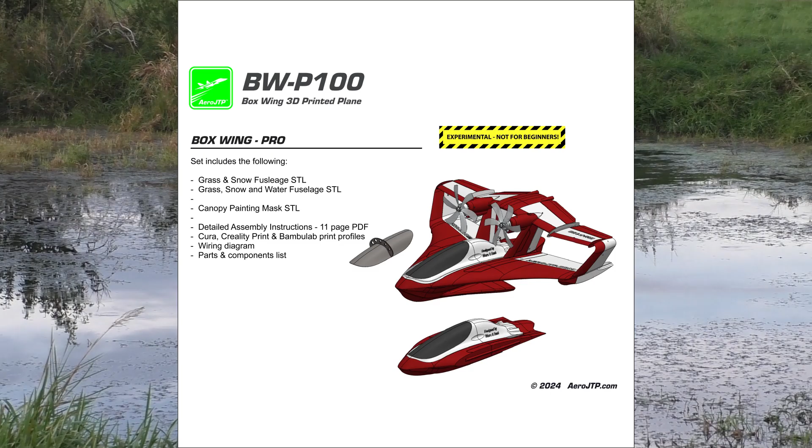Yes, that's me bringing the Boxwing out for his first water start. This is the biggest lake we had near the airport, so this was the only chance to test if it will be possible to start and land from water. And you can see here there aren't much difficulties. It works, and the Boxwing is finally available on our website aerojtp.com. Now let's take a look how the final prototype was made.

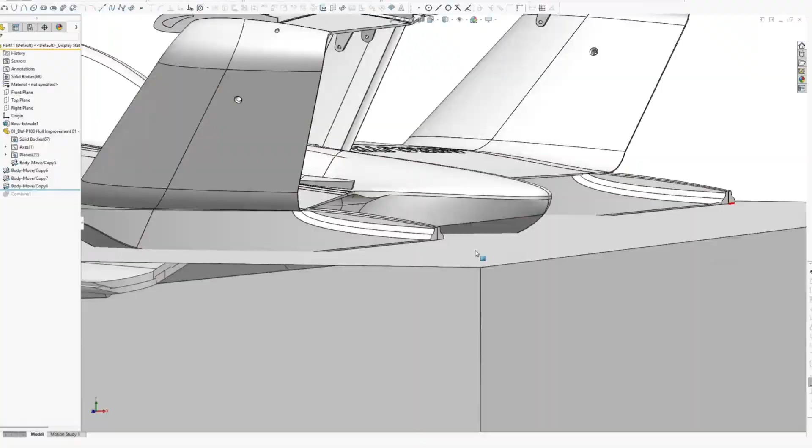Problem with the last prototype was that it just sank too deep into the water. It also doesn't glide as good as it should to perform a very short distance water start. So we had to design the whole underbody fuselage. Here you can see what we did: we just spread the wings and built it out like a kind of surfboard with much more area for better buoyancy and also better glide capacity, so it will lift off the whole body immediately when the Boxwing starts accelerating on the water surface.

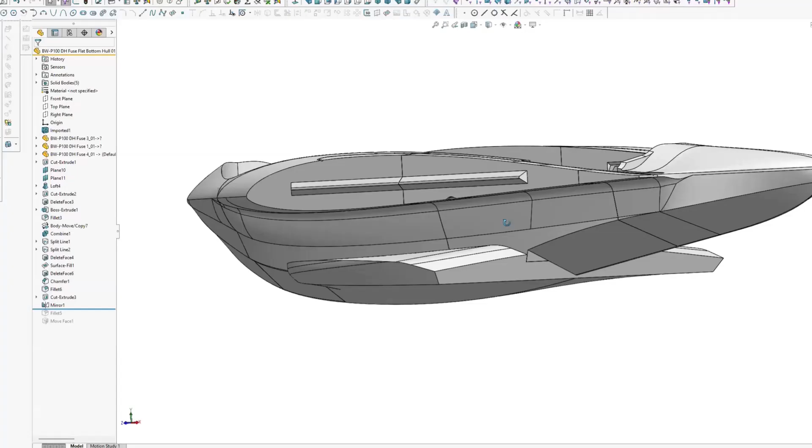Also on the tail was a lot of volume added to prevent deep sinking into the water, especially when immediately stopping from high speeds. And to give the Boxwing some grip while traveling on water, we added these steps at the tail from the underwing that should prevent too much sliding to each side.

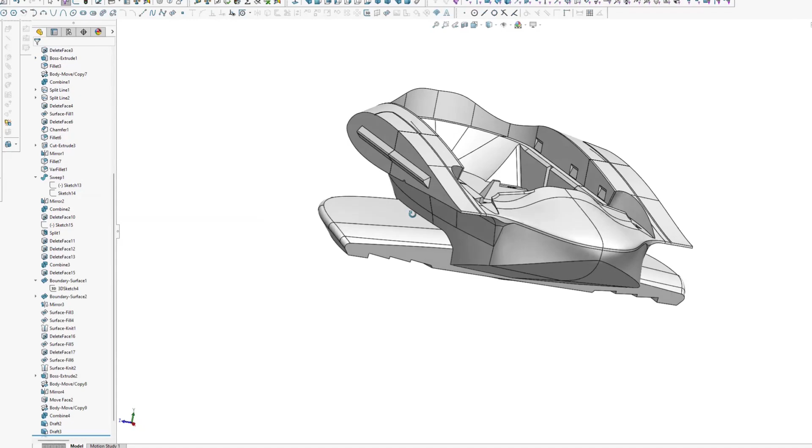Finally a cooling for the motor mount was installed, so it is also possible to print this from normal PLA. It should be printed from much more temperature resistant materials like PETG or ABS, but with this internal cooling tunnel it is possible and keeps the whole motor much more cool.

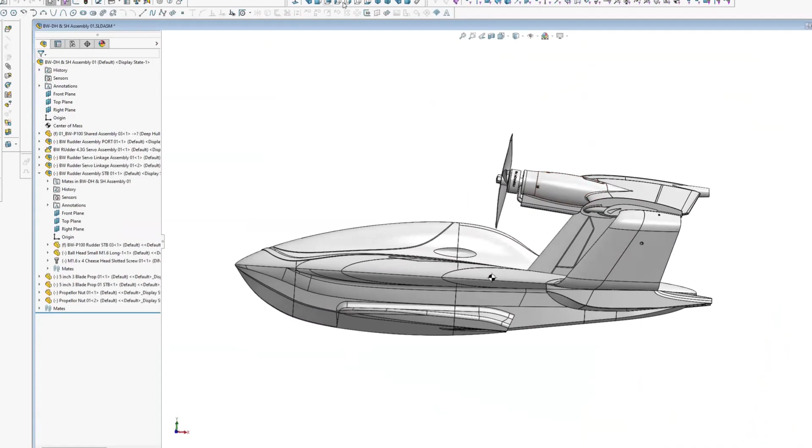And that's how it looked like, our final design from the boat version, the water version of the Boxwing. As the last step we added some nice FPV features where you can use two cameras, one fixed with a front view, and the second one which is on a gimbal for tilt and pan.

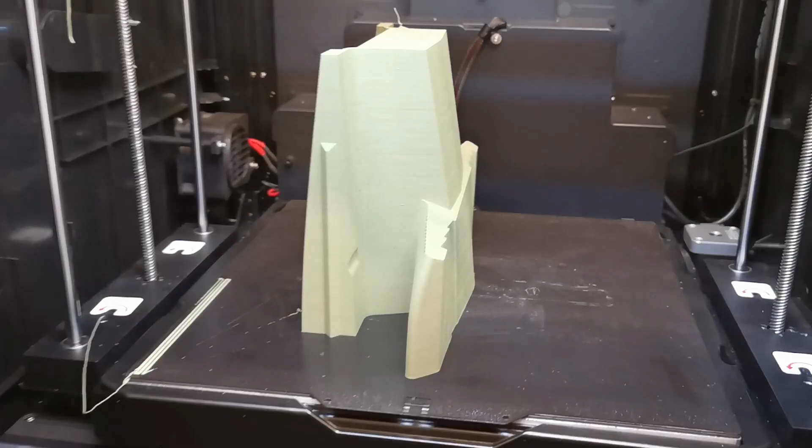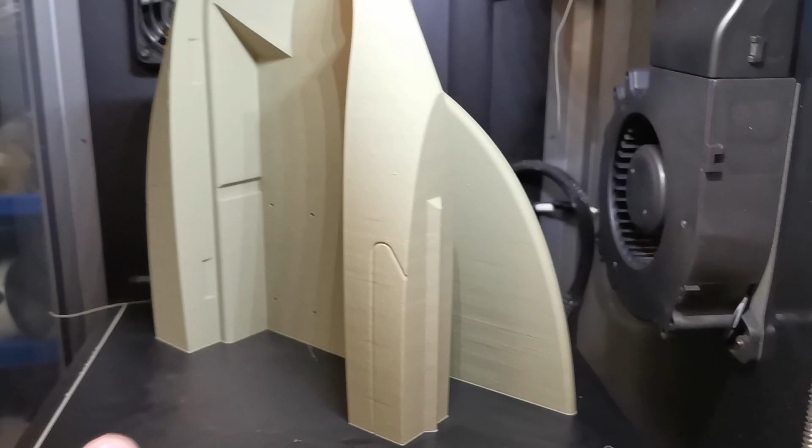And the new big parts with the new underwing are printed. Bambu Lab did a nice outer wing. Comes to the others, and here's the front part. Really love this outline.

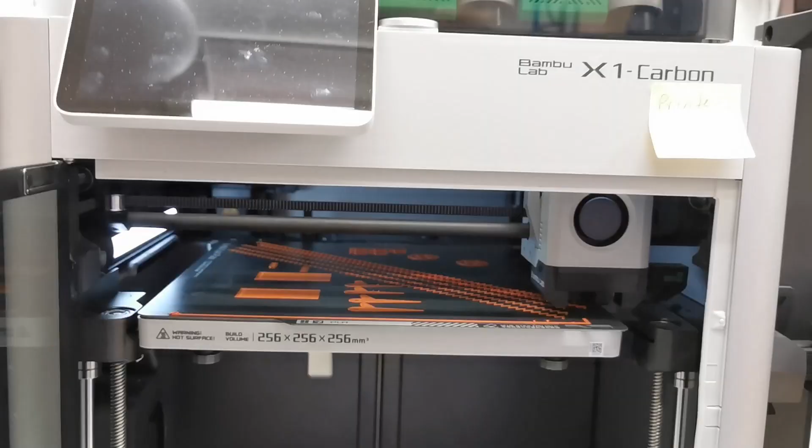And the last parts are getting ready. New wings with the fences. And the Bambu Lab made some wonderful PLA parts. First time these zigzag stripes printed, super sharp. Almost all parts are done.

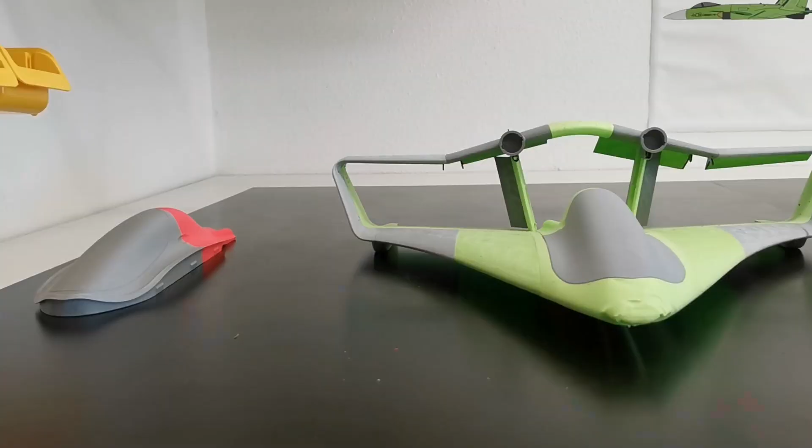It's time for prototype number 4. I think on no other model I built so many different prototypes, because this Boxwing is so special. Let's see how this is coming out.

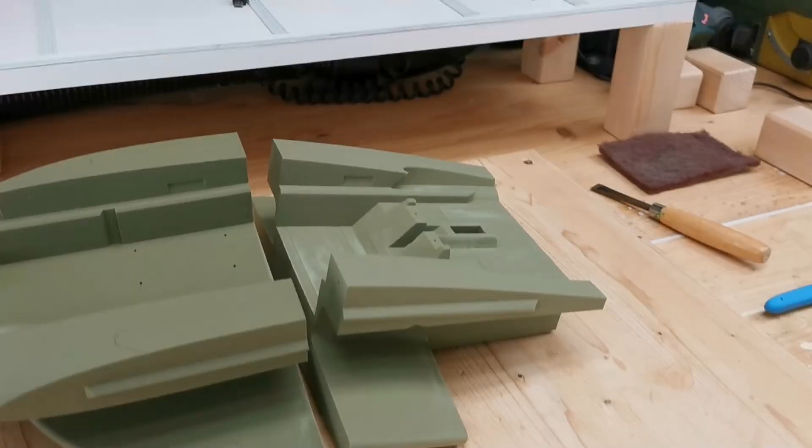Oh, here are the new special parts with complete integrated lower buoyancy wing. See what this weight says, 61 grams. That's really a big part, super lightweight and nicely detailed. And the second one, 44, perfect.

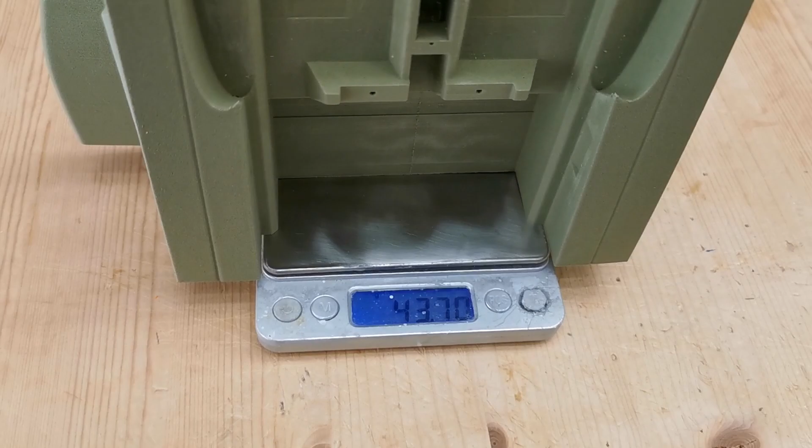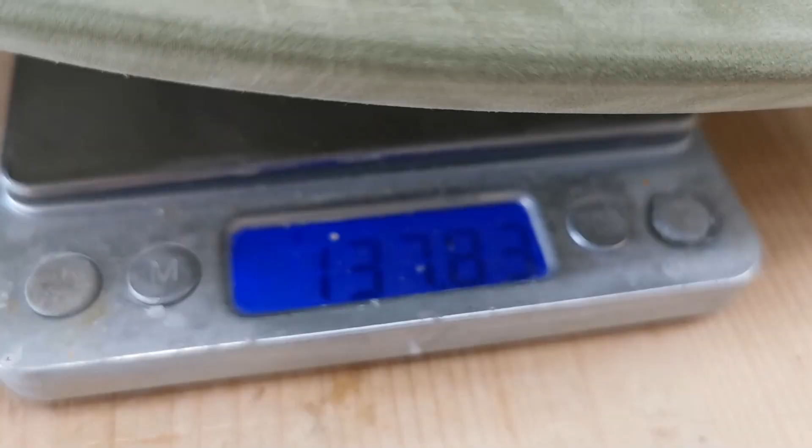The all-new Boxwing fuselage. And here it is, the all-new fuselage, with the special surfboard underdesign to glide on the water. Weight just 138 grams for this whole thing.

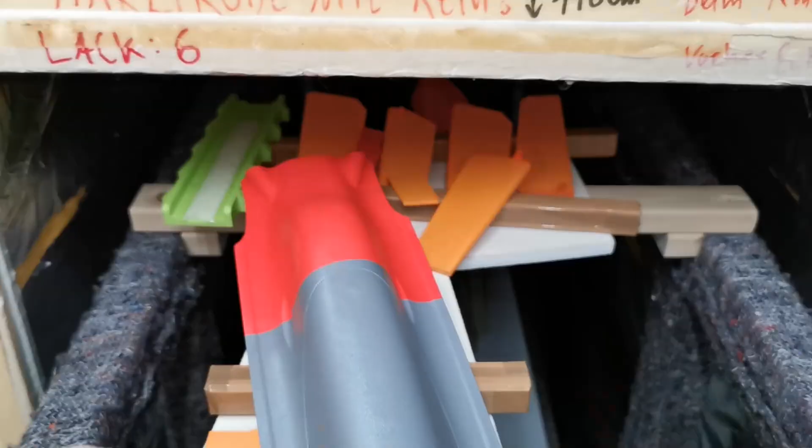It's getting closer, so parts are heated in the oven. They're looking good. This time I covered every part, also all the rudders, because they grow a little bit in volume when they get in touch with water. So everything has to be covered, especially the lower side I covered twice to seal them best possible. The rest is only covered one time.

Oh, a little bit of balancing. Okay. And also flying back to the workshop.

So, yeah, and you can see it: this is more rough, one time covered, and the lower side more shiny. Even here, I think the areas where I sanded a little bit, it sucks more resin in. Here I didn't sand so much, so maybe I give it a third one, but I think two is enough.

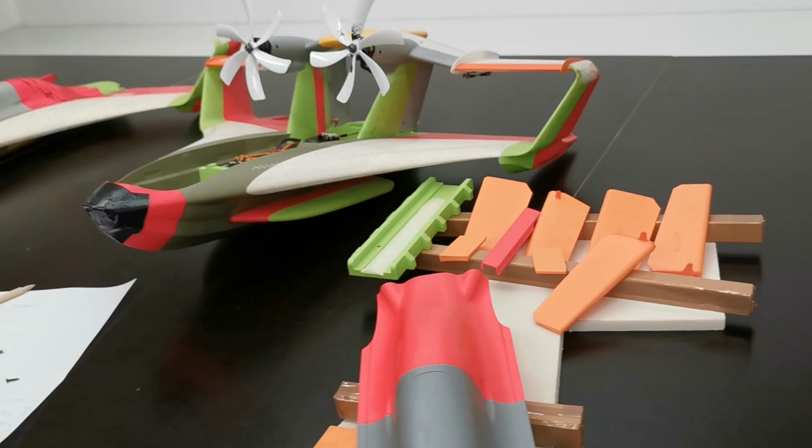Two is enough. I recognized some small water drops coming out of this version after the first water test when I covered it just once. That's the main reason why I started covering twice. But it's a really good seal. I also didn't recognize any extra weight from any water, and there was never any noise that there is some water in it. So, to make sure, cover the whole lower surface twice.

This also means the lower wing, everything that is in longer touch with water. On the upper side, covering one time with the resin is enough.

And that's how the new underwing works. It glides much better on water. Here we can also see it compared to the old one. The old one makes much more waves and has more resistance underwater.

Right from the beginning, I was super convinced that the Boxwing will do it on this tiny lake, and it shows off that this higher position, higher up over the water, makes the yaw much easier. You can see it's super maneuverable, and it also helped when you push forward with the elevators to lift up the tail — then you can rotate all around on a point. So I got a bit comfortable with this super small lake, and then let's go.

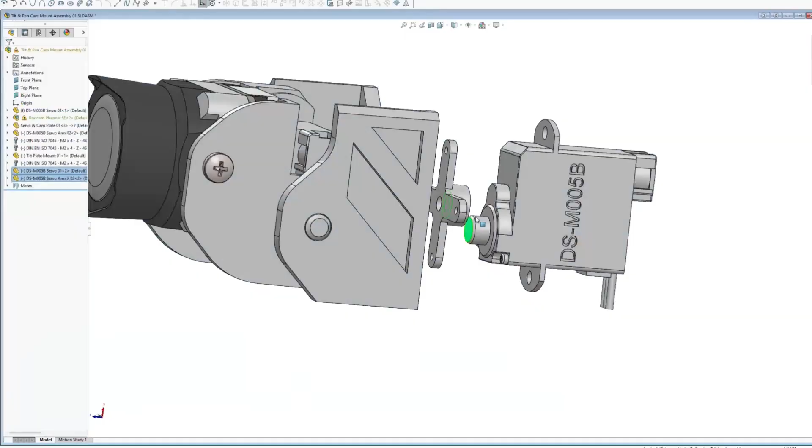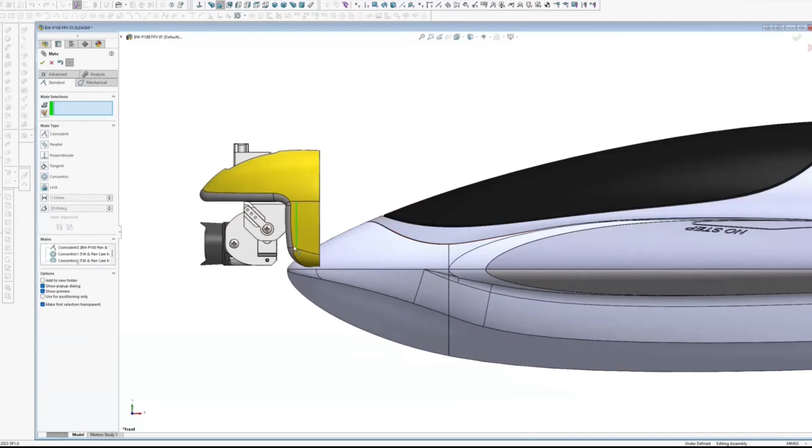Here I want to show you a little bit of our process of designing the camera version. This is the tilt and pan gimbal. It works with super micro servos, so it's super lightweight for these standard FPV cams. I think here we got a Runcam Phoenix SE installed, and we just have to design something between the camera, pan and tilt camera, and the Boxwing itself. And this came out really funny.

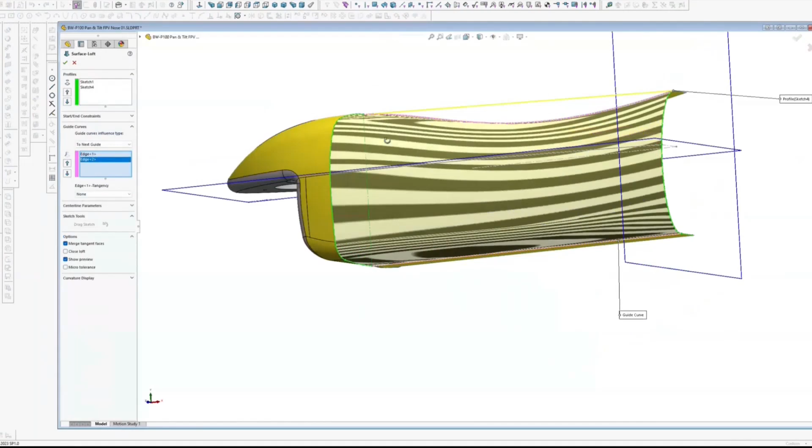Mark is always saying we designed a duck or a chicken. Yeah, I don't know, maybe what is your intention? You can write it in the comments what you think the Boxwing looks like with this camera mount on the nose installed.

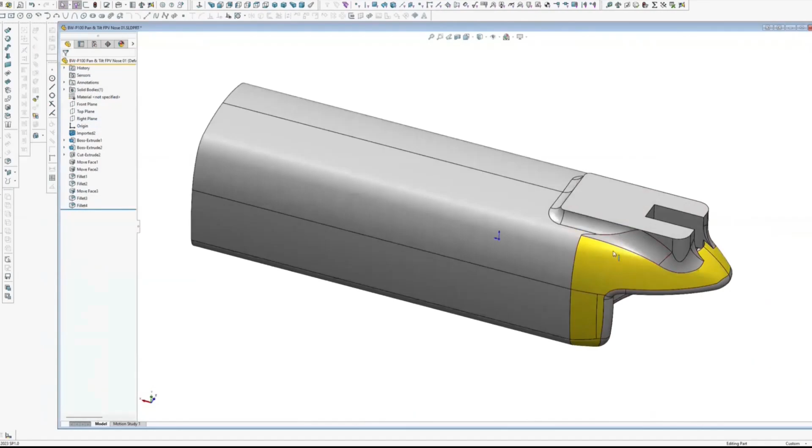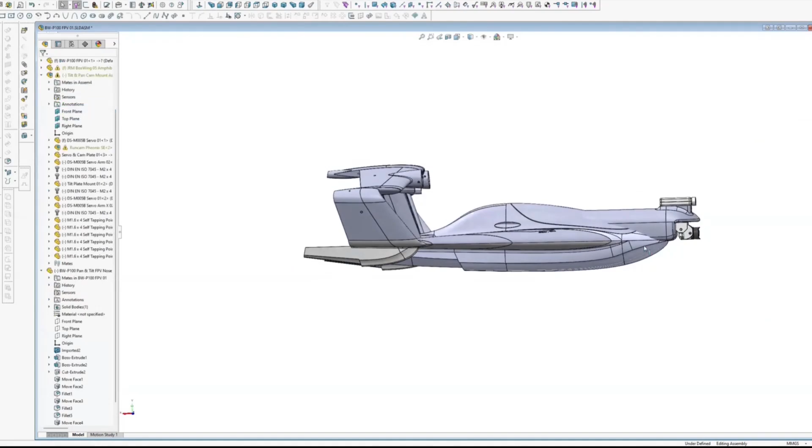But even if it looks funny, it works really nice. You can have a very new experience, I think, with flying this Boxwing in FPV, because it's really a mixture from a drone and normal plane. You've got super thrust-to-weight capacity, more than 2:1. You can start vertically, land nearly vertically, and fly speeds of over 150 km/h.

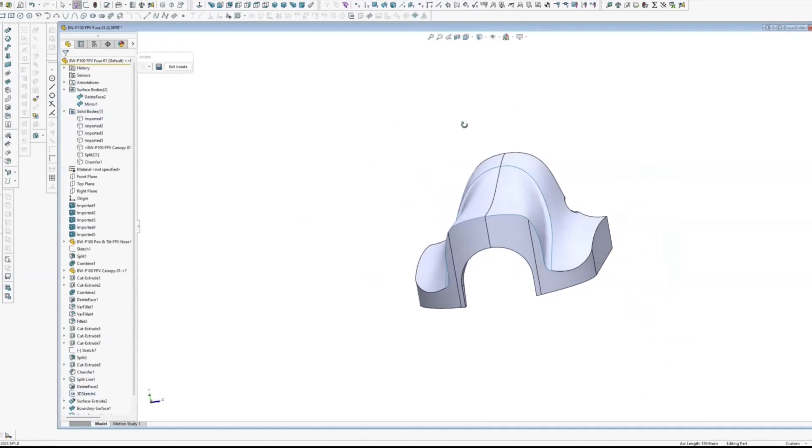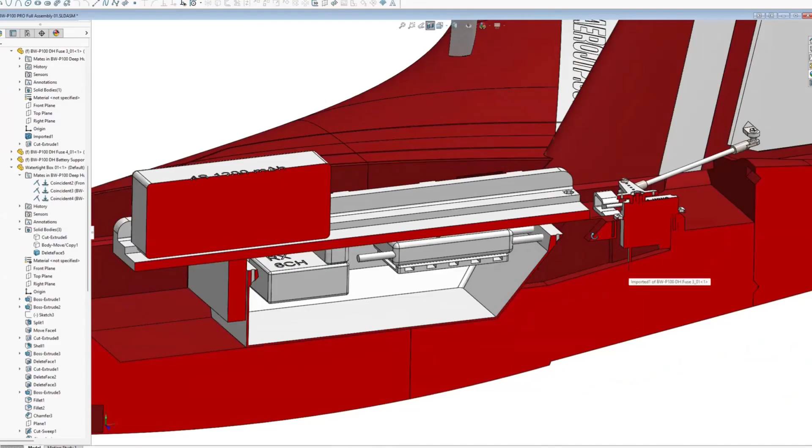At the moment with these 6-blade props, these props are not for high speed, and also the engines are with 1750 kV, so this setup is more for high thrust, because I want to be safe on the water starts. But when you go to 2000 or 2500 kV and use a 3-blade prop, I think you can go much faster, and you can also install really high power engines. The engine nacelles are reinforced with some carbon rods, so there shouldn't be any problem.

And here we can take a final look on the water Boxwing and all its details.

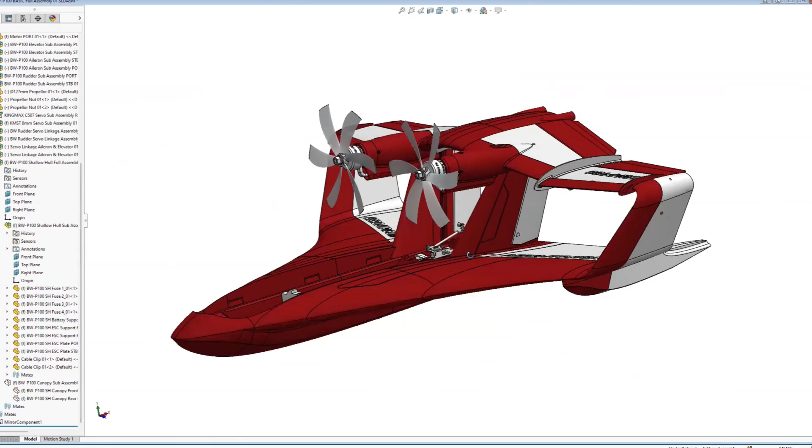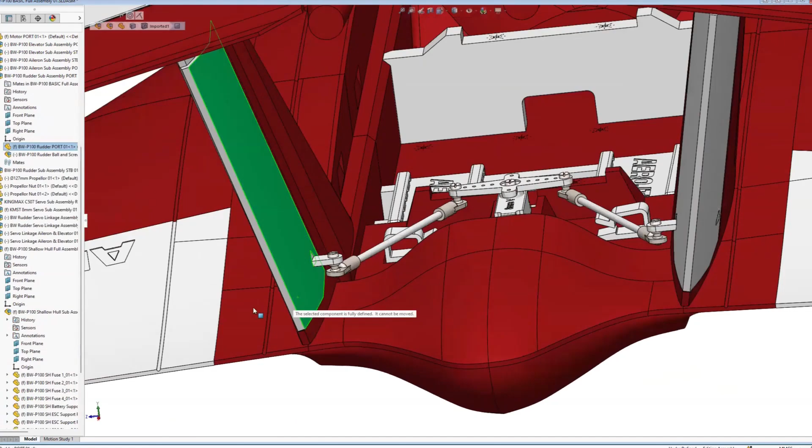So let's have a closer look on the two variants you can get on Aero JTP. We start with the narrow version, or basic version, of the Boxwing. This is designed for land start, vertical start and snow start, but not for water. It has a narrow fuselage, so it's a little more lightweight, and you don't have to cover it with resin to make it watertight. Here you can see how we install the electronics with the two holders for the ESCs, and this is the rudder servo working.

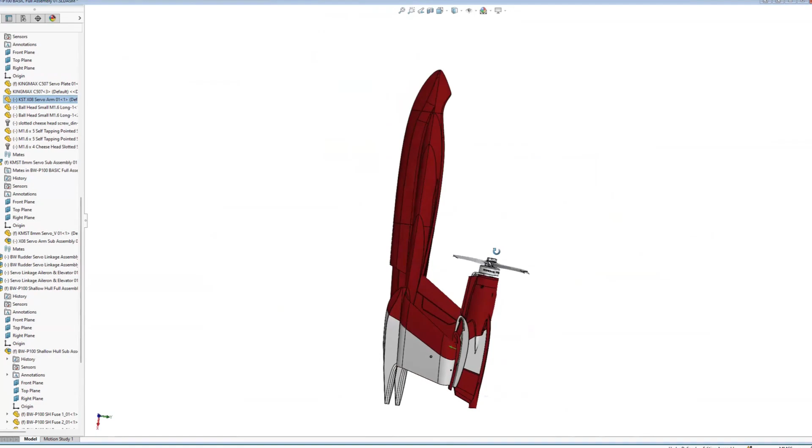Here on this particular plane we use very high quality servos for very precise control. I think these are 8mm aluminum case servos, which are very strong and also lightweight, and especially super precise.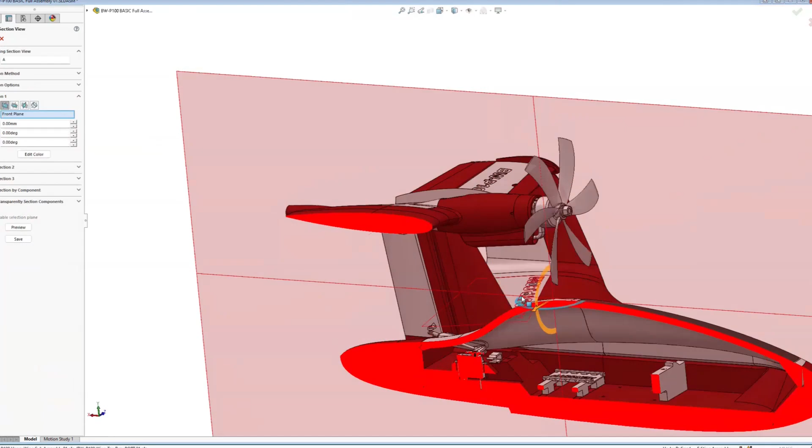So let's take a look on the upper wing. Here we installed these slats on the outer wing in combination with some wing fences to make the transition from normal flight to these high alpha maneuvers as smooth as possible. And here you can see how it looks inside the Boxwing, with these cooling channels on the engine to keep the whole motor mount cool, so there will be no thermal problems with the printed motor adapter.

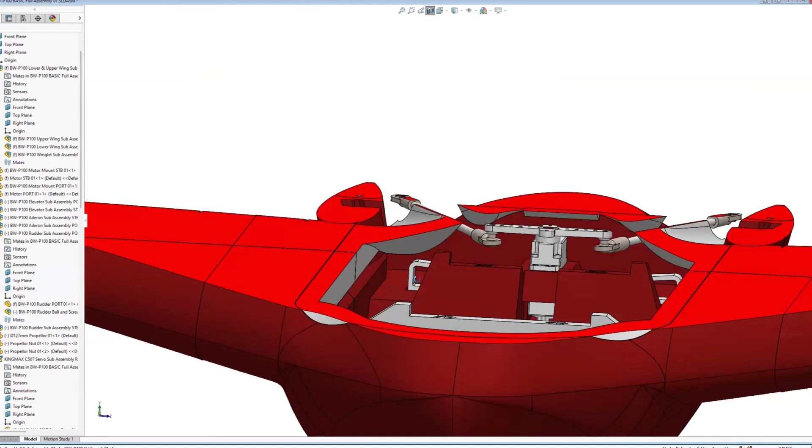And this is how the servo looks with the arms and the ball heads. Everything is kept super easy and super light, super easy to install into the fuselage. You can reach everything very nicely by just removing the canopy.

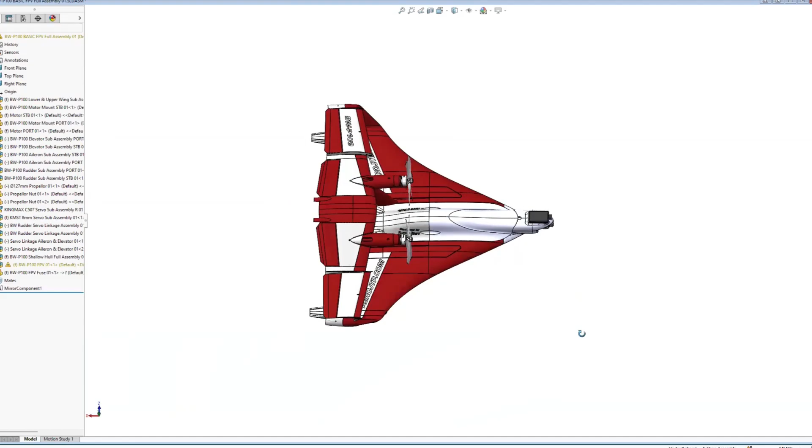And that's the shallow version with the FPV front section installed. Here we can see the camera, the front camera for tilt and pan, and also how it looks inside.

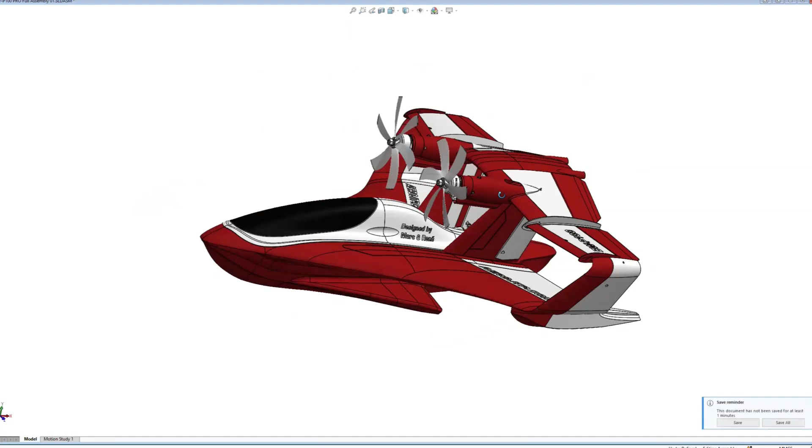And now let's go on with the water version, with this big fuselage and this lower wing. This is not made for FPV because of the water, and I think the camera would touch the water anytime, so we made this water nose just for the shallow version. But here you can see the watertight box and all the electronics inside. We recommend tightening these holes where the wires run through, on the top of the box, with some super glue.

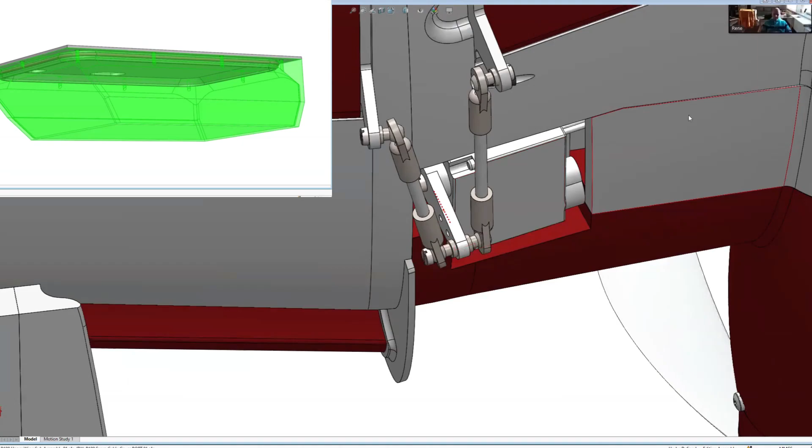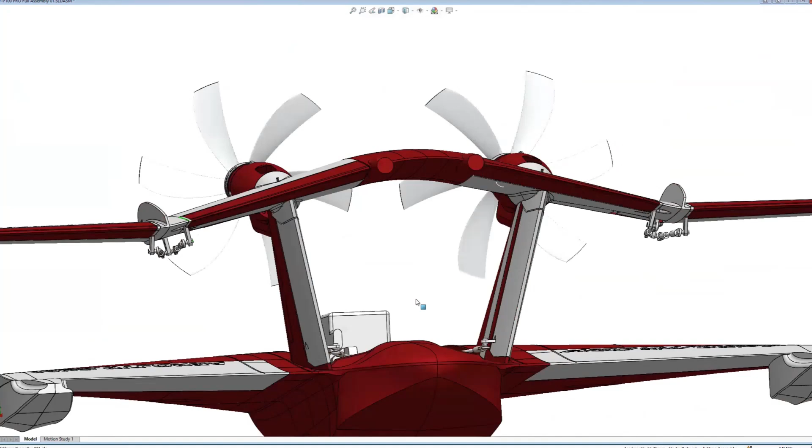And here you can see the upper servos. They are also mounted very high above the water, so there shouldn't be any problem. And you can see we had to make some extra dents to reach these super big deflections, which are necessary to fly these high angles of attack. And here's again the rudder servo, and that's how it looks with the canopy installed.

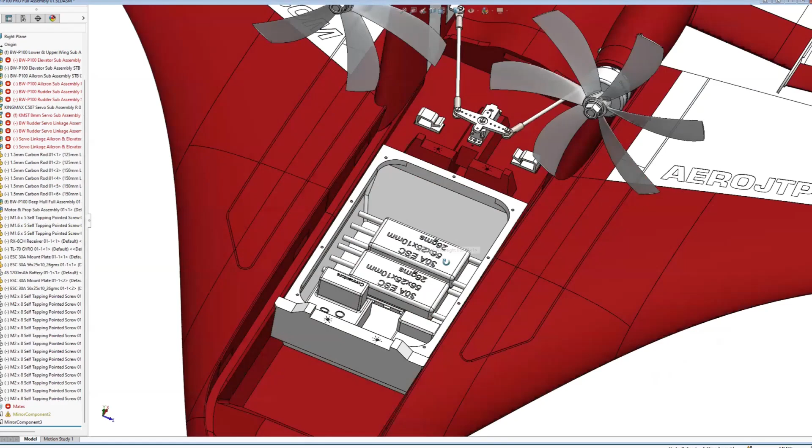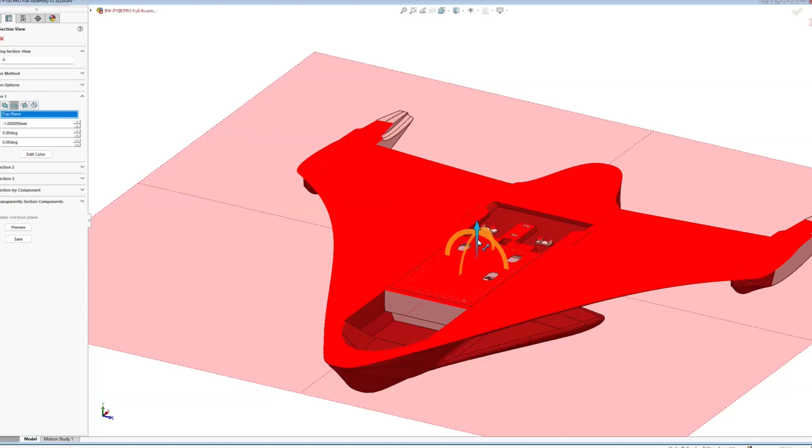Yeah, we say especially it is not for beginners, because there are some specialties like I explained before, which you have to keep in mind. But at the end, this is easy for training. I never get any trouble, and you know, this is the 4th prototype with a lot of tuning on it, and it flies very well overall, especially water starts and landings, and these vertical landings are a lot of fun.